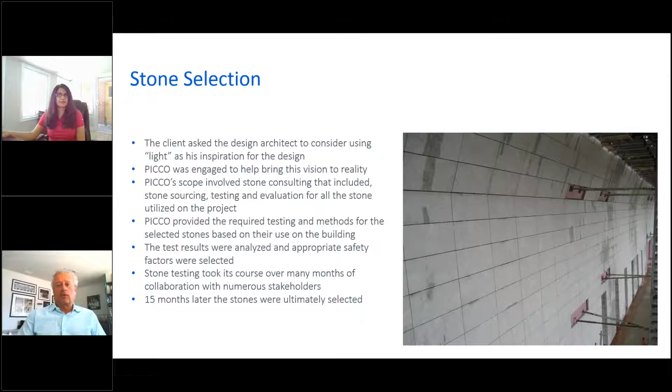So it was quite a process that they went through, and the main materials that were chosen were Brazilian granite that was used to clad the museum project, limestone sourced from Croatia on the Ismaili Center, and black granite sourced from China on the pools, and a white granite from China that was also used for the pavers, benches, and planters in the landscaping area. So you can see that stones were selected from various parts of the world, and there was quite a series of different materials that were looked at for various applications.

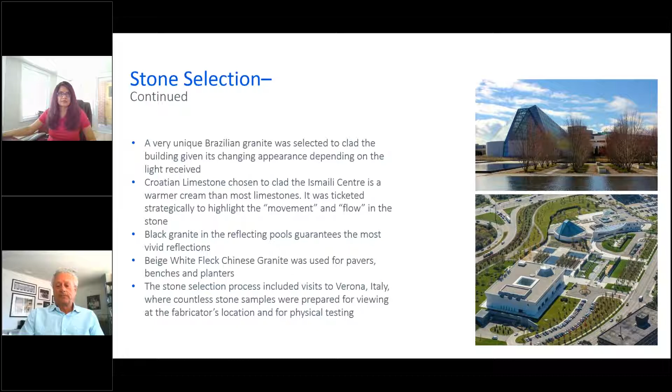So the sourcing and the testing of the material is the next topic. And Afsheen, if you can maybe run through this. Yeah. So ASTM testing: whenever specifying natural stone, it is very important to understand the material's inherent characteristics so that appropriate stone can be chosen for the application required. For example, if we are using the stone for cladding, there are specific tests that are required compared to when the stone is only used for pavers. So you don't have to go through all the testing depending on the application of the stone.

So as a specifier, the design professional is responsible for material selection based on the aesthetics and performance criteria. He or she must obtain visual and physical samples and acquire the test results and backup claims about the material's performance for the particular application. Now, it is recommended that ASTM test results are not older than 3 years, but in some cases, historic data can be used, again, depending on the application. It may not be as critical to have the most up-to-date data if it's only used for an interior bathroom facade or bathroom cladding.

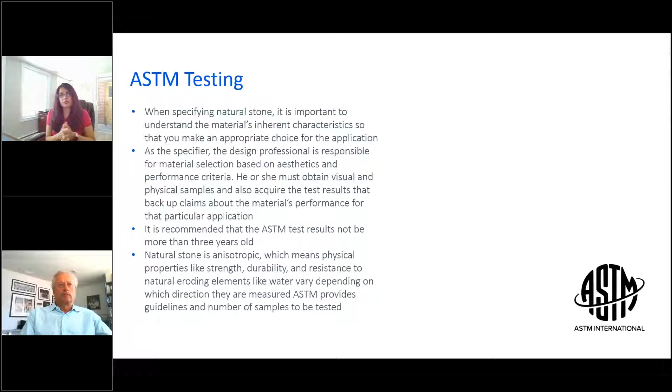Natural stone is anisotropic, which means physical properties like strength, durability, and resistance to natural eroding elements like water may vary depending on which direction it's measured. And ASTM does provide the guidelines and the number of samples to be tested for each application. These are the most commonly used test standards relevant to natural stone. I'm just going to read them out, and then we can elaborate on the importance of these tests.

So ASTM C97, the absorption and bulk specific gravity of dimension stone. ASTM C170, the standard test method for compressive strength of dimension stone. ASTM C99, the standard test method for modulus of rupture. ASTM C880, the standard test method for flexural strength of dimension stone. ASTM C1353, standard test method for abrasion resistance of dimension stone subjected to foot traffic using rotary platform double-headed abraser.

ANSI DCOF, that's the dynamic coefficient of friction. ASTM C1354, strength of individual stone anchorages in dimension stone. And ASTM C1201, the standard test method for structural performance of exterior dimension stone cladding systems by uniform static air pressure difference.

So ASTM C97, that's the absorption and the bulk specific gravity of dimension stone. So the absorption is the measure of the stone's porosity. This characteristic is an indicator of both its stain resistance and possibly its performance in cold, wet environments where it will be subjected to freeze-thaw cycles. This test also gives us the density of the stone, which is used in all our calculations whenever either the stone is stacked or individually load-bearing connections are used for those applications.

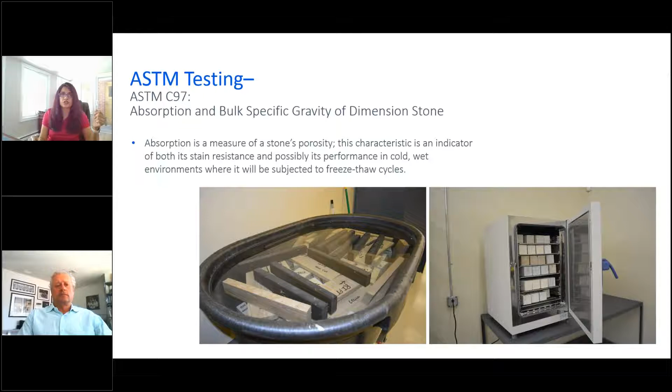ASTM C170. Now this test is the method of compressive strength of dimension stone. It measures the stone's resistance to crushing pressure. It's particularly important when we are using stone as structure. When stone is stacked for 1 story or 1.5 stories on each other, it becomes really important to know what the compressive strength of that stone is, so that an appropriate height can be stacked within the safety limits.

Yeah, if I could just add, Afsheen, stone is starting to be used a lot more as a structural element. With sustainability becoming very prominent in design now, we are utilizing stone as a structural element a lot more. For example, solid stone columns on porticos supporting potentially steel framed structures above, or different elements where we actually use the stone as the structure without using a steel column, for example, to core through the column and cladding it. So this becomes a very important measure of the stone's capability to take whatever loads are being imposed on it. And we'll get into safety factors and how they play a factor in it later.

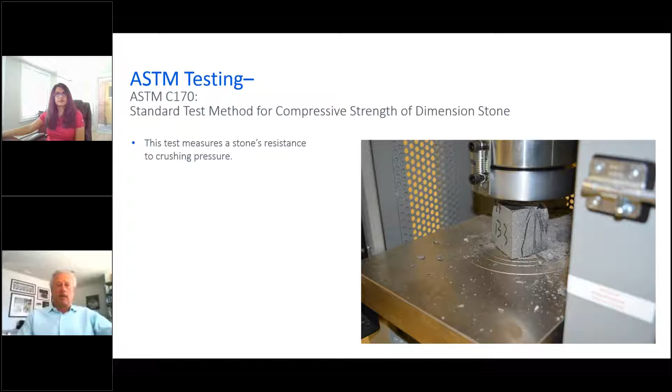So the next one is the ASTM C99, the standard test method for modulus of rupture. This test measures stone shear strength and bending resistance, generally used for stone greater than 2 inches. This test method and the flexural test method are interchangeable depending on the application. We may need either, or sometimes both are required.

ASTM C880, the standard test method for flexural strength of dimension stone. This test evaluates bending strength using 2 point loading and a sample that is the actual thickness of the stone to be installed. So you basically test the stone for flexural strength based on its actual dimension. Let's say the stone is used at just 1.25 inches. We will only use that thickness for that particular project to test it. And as we are changing these facades, more and more thinner stones are utilized in all these buildings, and this test becomes really important in order to come up with an actual safety factor to be used for safe installation.

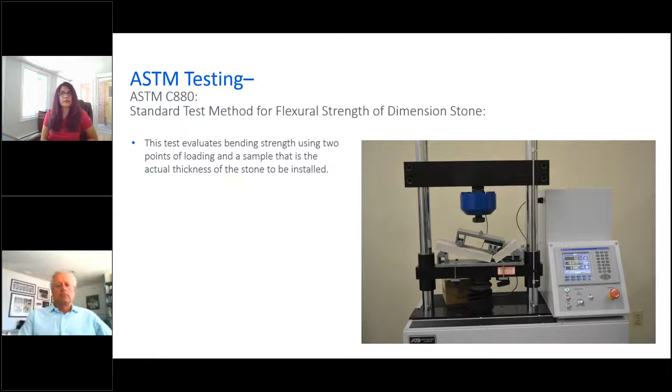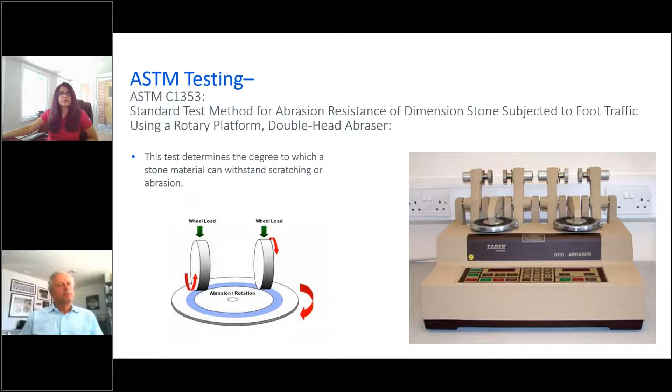The ASTM C1353 standard test method for abrasion resistance of dimension stone subjected to foot traffic. This test determines the degree to which a stone material can withstand scratching or abrasion. ASTM testing still, but this one is an ANSI dynamic coefficient of friction test. This test measures the slip resistance of an object in motion. ANSI A326.3 states that hard flooring surfaces in level interior spaces that are expected to be walked on when wet shall have a dynamic coefficient of friction of 0.42 or greater for safe installation.

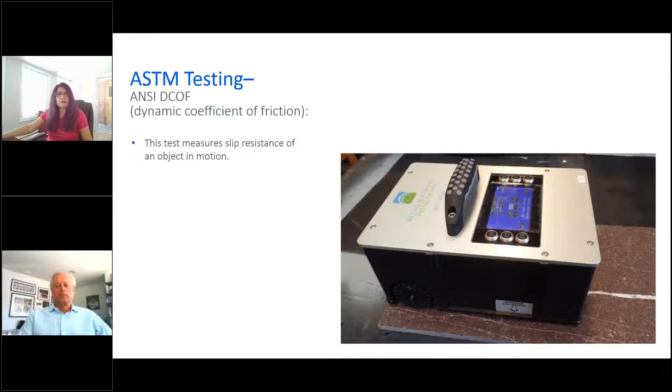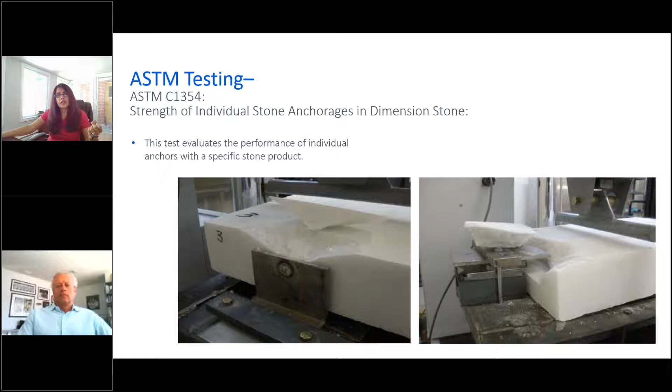The ASTM C1201 test is a full panel test, used in some applications where we want to test the actual assembly that we're proposing for the job. So you're getting the information from the flexural strength of the stone and from the anchors. You assemble a full-scale panel with an airbag put in behind it to simulate wind pressure, and you load the panel up. It will demonstrate the mode of failure. We'll take it up to whatever load it fails at, and again, it's another measure of the safety factor for the entire assembly. What we usually do in this case is when we have materials that may have variabilities with respect to veining, sometimes the flexural strengths may show some lower failures at some of the vein locations.

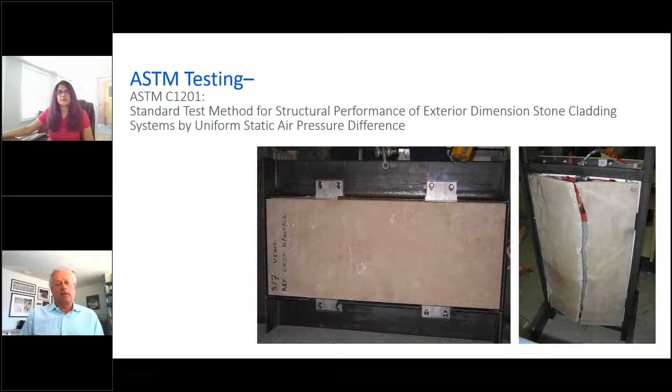The other thing that's also very important is mock-ups. And mock-ups can be various sizes and for various reasons. Aesthetic mock-ups are one thing to actually see the variation of the stone within the assembly. You can establish certain parameters with what's acceptable from visual perspectives with regard to the stone.

And it also tests the installation on more complex installations. How easy is the connection system? How much adjustment is in the connection system? Is there enough adjustment in it? So these are all things that can be monitored and adjusted during the mock-up stage if there are any issues that are identified.

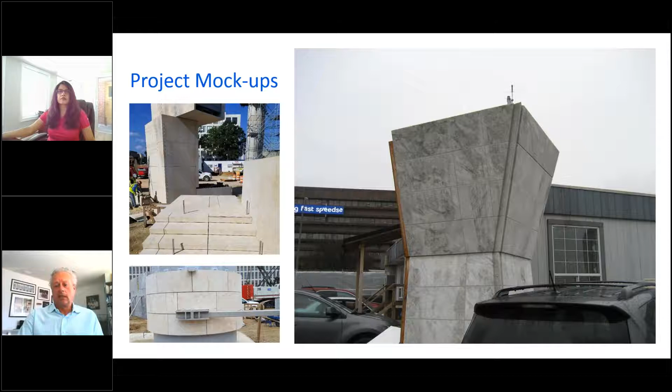Another thing that becomes prominent on much larger projects is full-scale mock-ups, where you're actually testing the air and water penetrations, assemblies, caulking, sealing, pressure differentials. You can create pressure differentials within the interior and exterior space. And here's some examples of a few of the projects we got involved with.

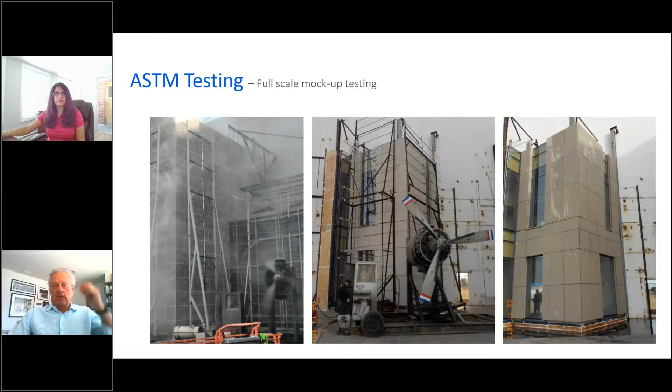So it was a very, very successful application of that. And Afsheen played an integral role in the design and engineering of that.

Now, the test results and the selection of safety factors. Once the test results are received, we interpret the results, see what the variation of the results tells us for all those different samples, and then we assign appropriate safety factors.

For example, depending on the coefficient of variance of all the test results we receive, the safety factor could be anywhere from 5 if the coefficient of variance is 10% or less, to a safety factor of 8 if the coefficient of variance is 20%, or to 12. Now, it all depends on how variable the material is and what kind of test results we are getting.

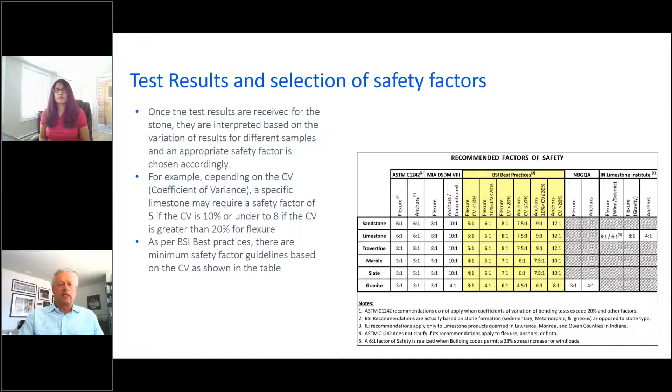So these are used as guidelines. And as Afsheen mentioned, the more data we have, the better we can reflect what the appropriate safety factor is for the actual material that we're using. So I'm going to delve a little deeper here with an actual example on 2 different materials and the series of tests that we have.

So in many cases, when we ask a quarry for data on their material, they would provide us with the average strength of that material. So we could have, in this case here, 2 different limestones, both having relatively equal flexural strength, 1,018 and 1,006. We can design these materials basically in a very similar way if this is the only data we have.

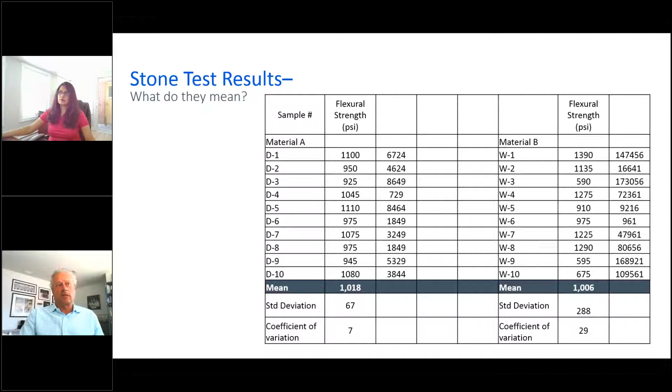What this allows us to do is, one, ensure safety. If we're using material B, we obviously need a higher safety factor. If we're using material A, being a more consistent material, it allows us to design to a smaller safety factor, which is designing efficiency into the system. We're not unnecessarily adding safety factor just because of the material class that it's in and the recommended safety factors. So the more data we have on testing, especially with larger projects, it can actually result in a lot of saving to the project by having this information.

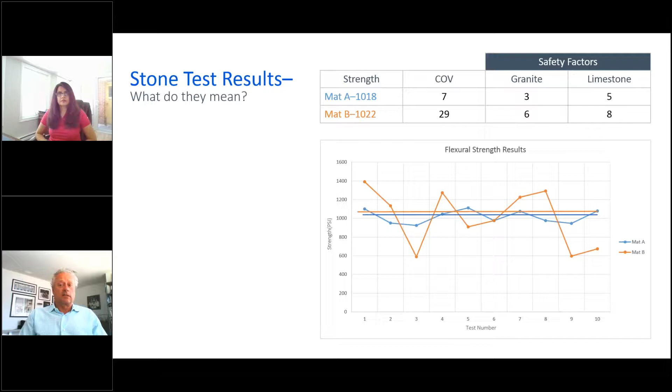So I hope, we're getting into pretty technical material here, but I think it's a very clear demonstration on why these test programs are very important, especially on larger projects, to really get appropriate data to do a proper, efficient design and safe design on the system. So I think this clearly demonstrates that.

Just to give you a sample of some of the materials that were investigated on the Aga Khan Park, from sandstones to marbles to granites to limestones, a whole bunch of different materials were selected, and they were different color palettes and different ways that the light reflected on them. So a whole gamut of material was investigated and tested. The first group of samples were collected based on aesthetics. Then after the first set of testing program, we vetted out a bunch of material that wasn't going to work because of technical issues. And then as it got narrowed down, the testing program grew with the smaller sample of the materials that made the short list.

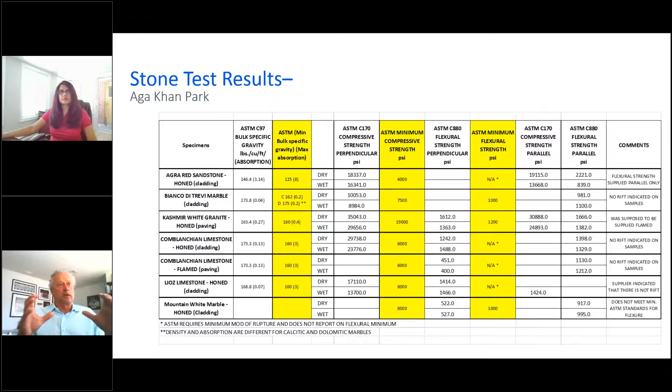And at the final selection, we can see that a limestone for the Ismaili Center was selected for the cladding, the Dalma cream Croatian limestone. The Margarita White Brazilian granite was chosen for the Aga Khan cladding, and I believe it was a sandblasted finish that really allowed the crystals to shine in the light and create a really nice effect. In the reflecting pools, a black granite was chosen, and you'll see in the photos that we show you later the effect of having that black surface on the reflecting pools and how it really creates a mirror finish.

This material here was obviously chosen to be a highly durable material because it was going to be subjected to water all the time and a lot of freeze-thaw cycles. And the same thing with the material chosen for the pavers, planters, and benches. It had to be a very durable material because it was going to be exposed to the elements a lot and horizontal surfaces. And these were the final selection of the main materials on the project.

So after we finished our scope with the owner group in helping them vet and select the materials, we were then hired by Clifford Masonry to do their engineering on their anchoring design. Afsheen, maybe you speak to how we played with Clifford on the project.

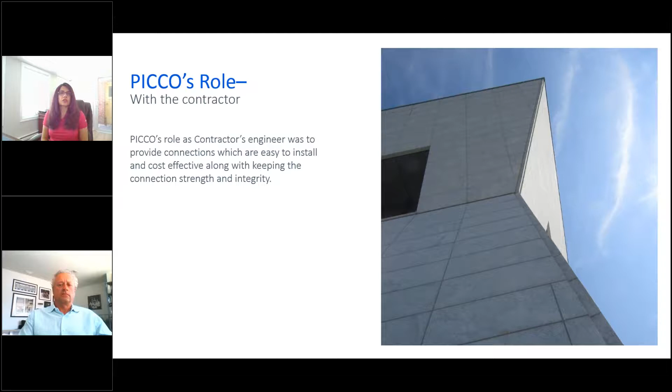Yeah, so once we were hired by Clifford, the main goal was to provide the connections which are simple to install and will cover most of the conditions based on the variance of the concrete in and out. All the connections needed to be very robust at the same time, so that all the joints that were designed can be achieved. And we came up with a really cost-effective solution with 2-piece connections, in some cases 3-piece connections, in order to install this complex geometry.

So we provided these kind of concrete connections with 2-piece connections at the corners, and this shape was not just going in, it was going out on either side at the corner. So in order to keep one connection, there were slots provided in both these plates in order to make as little connection or plate sizes as possible to mitigate issues on site.

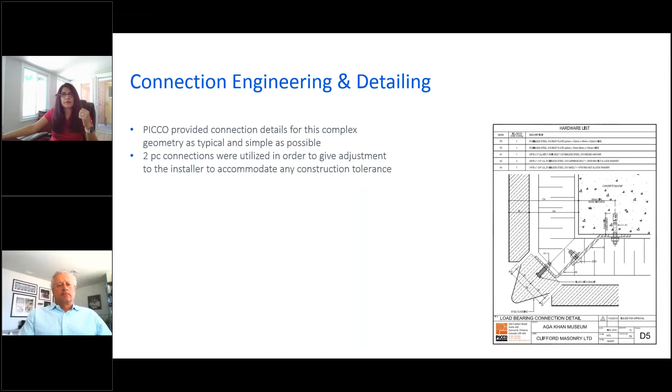You can see here the D4 connection, it's a 3-piece connection. So the main connection is at the back, the angle, and then another plate comes which has the tolerance of in and out, and then a liner plate at the back of the stone. Same thing at D1 and D3.

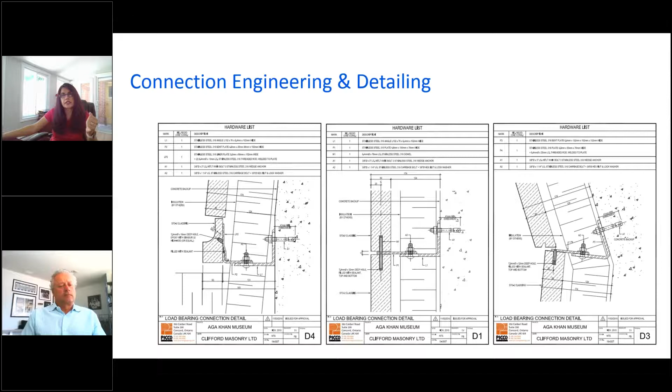These were two-piece connections. D3, as you can see, how the geometry of the concrete and the shape changes. So in order to make that installation easy, the angles, or the plates, were bent in the same angle as the concrete wall. And you can see from these pictures, oh, go ahead.

These pictures, when we did the installation, all these connections had to go all the way to the back where the concrete is, with the backup structure. And the insulation was dealt with by cutting out blocks and installing the anchors directly to the concrete, and then replacing the insulation. They installed the foams and the blocks back and taped it to ensure the proper seal.

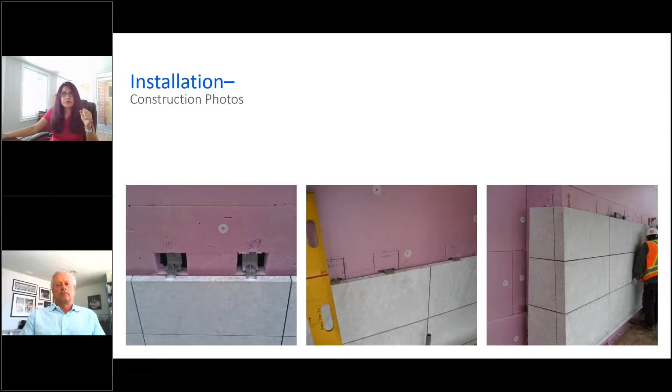in these kind of cases, it does require special testing sometimes to deal with the complex geometry, and that's where the ASTM tests come really handy, and we can get these as a full-size performance mock-up or full-size anchorage testing mock-up done on site.

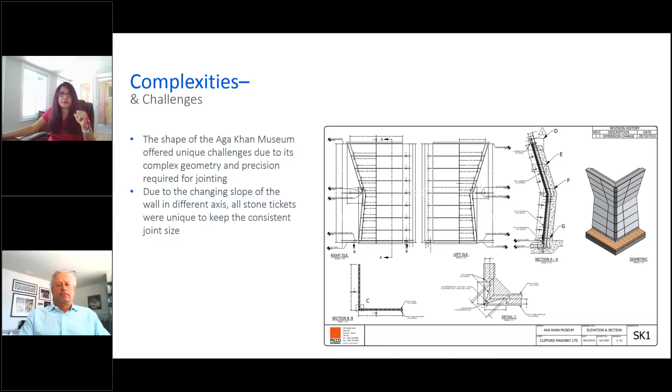There's another mock-up corner drawing, how it came about. You can see all these joints, and because the architect was really particular about each and every detail of the project, the joints were very important, that they were all kept the same. All these stone pieces were unique because of the changing geometry from in and out, and then back into the structure.

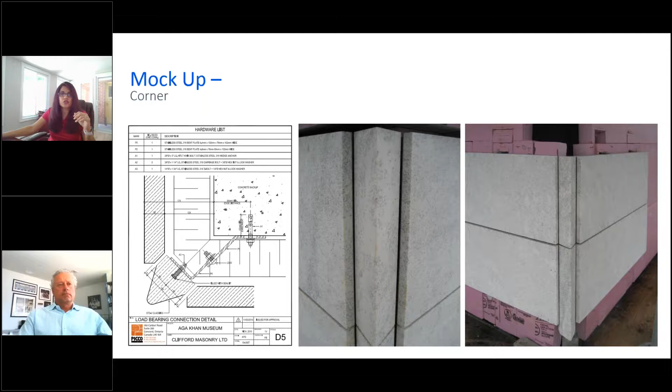So Daniel Teramura, the partner in Moriyama Teshima, said that I don't remember any other client who has taken that kind of interest in the details as Mr. Aga Khan did. Yeah, apparently there were stories that he was visiting the site quite regularly, and being quite critical of some of the details. So he was very, very engaged on the project.

And I think it was a testament to him and a testament to the team that if you've been to the place, you can recognize the level of detail and care that was taken by all the stakeholders in both the design and the execution. And I think the pictures speak for themselves. We'll just run through some of the photos of the finished part now and demonstrate what we're talking about. And it's quite a spectacular place, both interior and exterior.

If you do get a chance to go and see the museum interior space, you really get an understanding of their focus of how light played an important role with all the different ways that they're allowing light to come into the various spaces. And there's a courtyard right in the middle and some of the skylights. Understanding some of that vision and walking through the space, you can really feel how that was an important aspect of the design and how they really pulled it off.